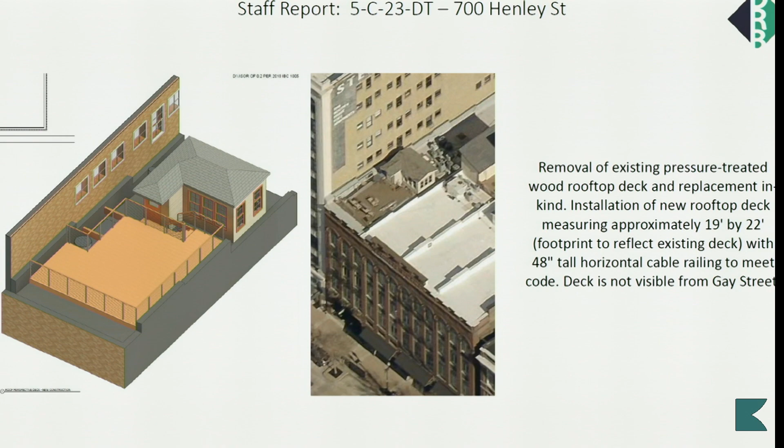The second was not at 700 Henley Street, that's an incorrect address. That's at the Commerce Building on the 100 block of Gay Street. The applicant removed an existing pressure-treated wood rooftop deck and replaced it in kind. You can see the existing deck in the pictometry rendering on the right, and a rendering on the left showing the new deck to be reconstructed. It's not visible from Gay Street.

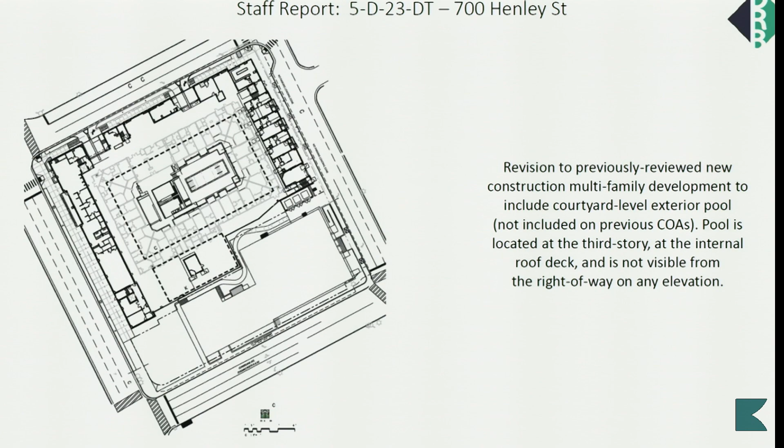At 700 Henley Street, the Church and Locust development, this is a revision to a previously reviewed new construction multifamily development. It includes a courtyard level exterior pool that was not included on previous COAs. This pool is located just at the 3rd story at an internal roof deck. It's not visible from the right-of-way on any elevation.

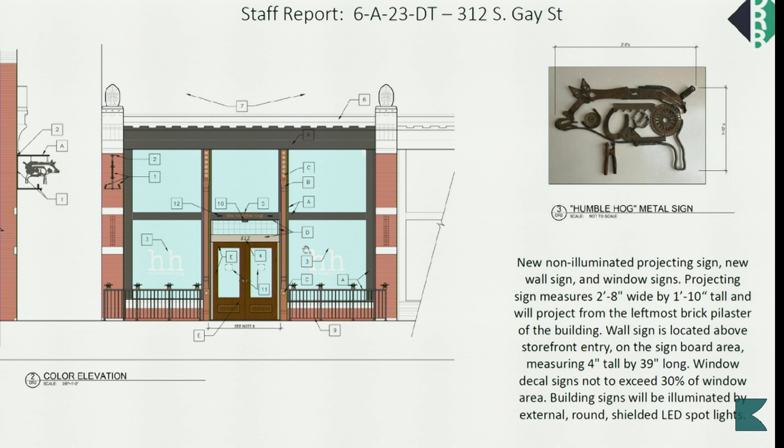On the Century Building at 312 South Gay Street, there will be a new non-illuminated projecting sign, a new wall sign, and window signs. The projecting sign here is a sculptural element that will be illuminated by external round lights. There's a wall sign centered above the primary entry, the leftmost entry for this storefront on the signboard area. And then window decals that won't exceed 30% of the window area. That's it.

Thank you for that. Let's move on to the certificates of appropriateness. We have 706 Walnut Street, 6B23DT. Lindsay, can you give us an overview on that?

Yes, this is a relatively minor revision to previously approved drawings. The board reviewed this project initially in April 2022. This is focusing on the north elevation fronting Church Avenue and the leftmost bay on the 2nd through 5th stories, which are now proposed to be partially enclosed with new exterior brick to match the existing brick on the building. These will be smaller, square, single light storefront windows aligned with the bottom of the following bays, so those windows here. And on the rear elevation, there are revisions that include a new brick enclosed stair area.

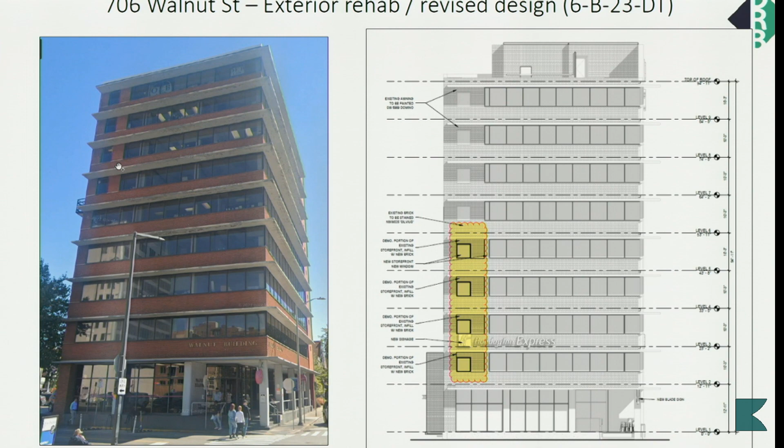Some of the staff comments in the report: enclosing portions of original window patterns isn't typically considered appropriate. However, these proposed modifications to the windows on the 2nd through 5th stories do reflect some previous modifications on the upper level. You can see the existing conditions in this photograph here. However, the existing windows on the 6th through 9th stories are aligned with the flat awnings dividing each story, as opposed to, as indicated in the drawings, being aligned with the bottom of these windows that follow. So the staff comment would be that the enclosed windows on the 2nd through 5th stories should reflect those on the upper stories in size, placement, and relationship to the other windows.

In terms of the rear elevation stairwell, that's located on a secondary elevation, and those materials are compatible with the building. So staff is recommending approval of 6B23DT, subject to the condition that revisions to the placement or size of the enclosed windows, with the intent for them to be compatible with the existing windows, be submitted to staff for approval. Thank you for that explanation.

Is there anyone from the development group that would like to speak?

These revisions were really due to some code implications with extending the stairwell down and how the fire-rated wall would intersect with the existing exterior glass windows. Hence why the window placements were reduced on the front elevation. And on the side of the building, we have decided to remove the existing fire escape stair, and due to the proximity of the building to the property line, we wanted to enclose the new one-story stair access to abide by the IBC.

That was it. I don't know if you have any other questions regarding the revisions.

No, thank you. Is there anybody that would like to speak in opposition? No, thank you. Okay, well, I'll open up questions for the board.

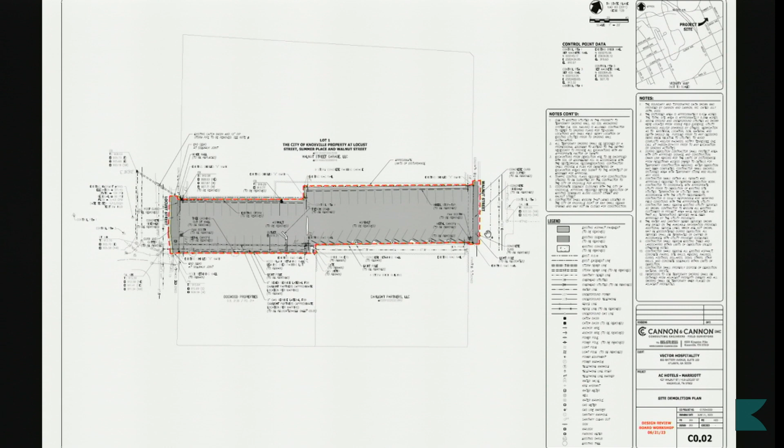Do we go to the next page? Let's see, probably—do we want to talk? We'll talk about the sidewalks later, but maybe we can go over the basic plan. So on the Locust side, let's go to the next page. There we go, we can step.

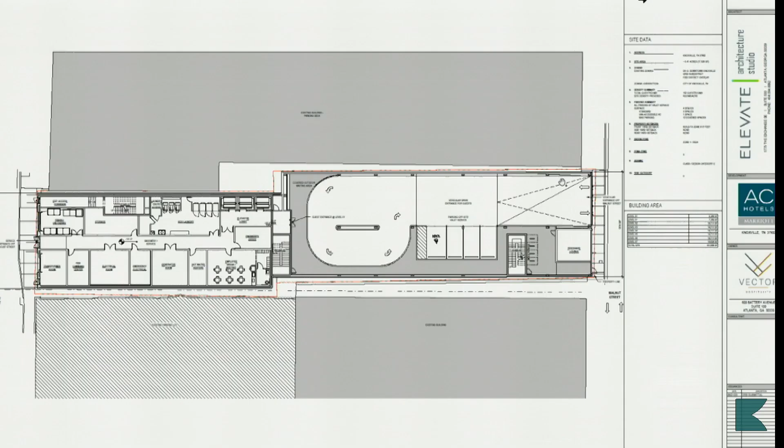So this is kind of a site plan that shows both sides at the 2 levels. On the Locust Street side, which is on plan left, is going to be our service entrance for the hotel. We've got trash, the major utilities, fire command center, back-of-house laundry, things like that. So basically we're viewing everything off of Locust as more of our service entrance side, and using Walnut Street—since that's a two-way street—as the hotel entrance side.

So on the ground floor, you'd come in and have a pretty small turnaround. And the goal of this project is really going to be, the majority of the parking is going to be off-site valet for the ownership team. And so we'd bring everybody into the hotel entrance on this side.

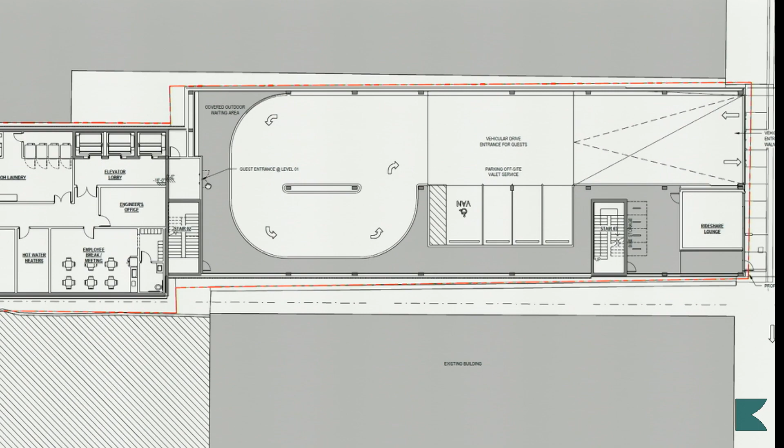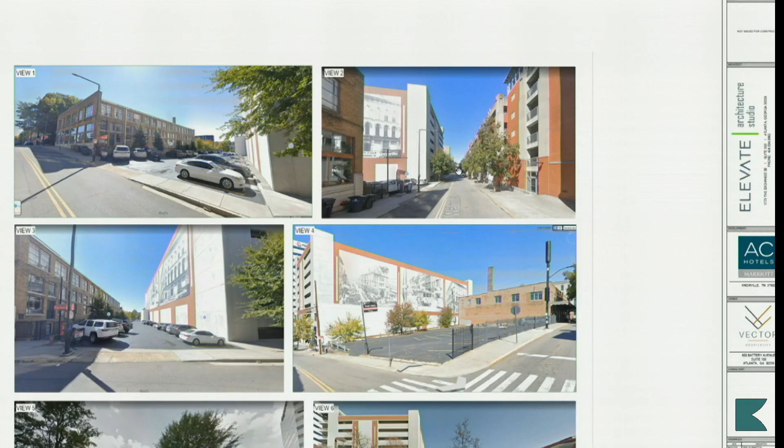And really the way that we've designed this hotel is on the ground floor would be the entry—or on this, what we're calling level 1, is the entry sequence to drive into the hotel. And then guests would come up to the hotel entrance into the elevator lobby. This is actually what we're considering a jump lobby, so the hotel registration, everything—they're going to be going straight to the 7th floor. If we want to go to, this is the entirety of that level.

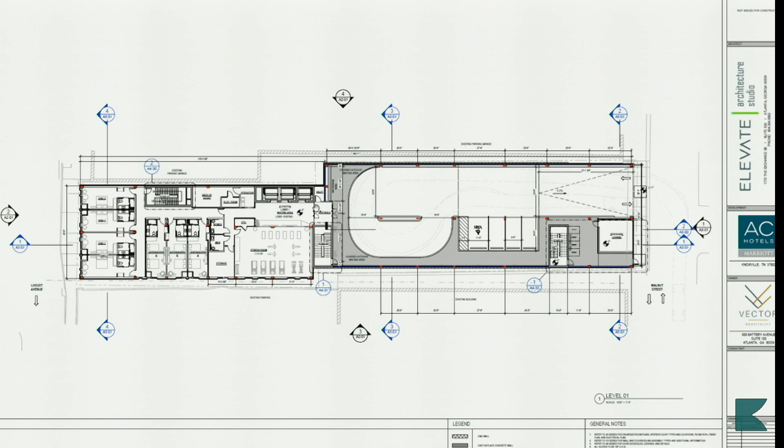When you come up, this is one level above Locust, but the same level as Walnut. We have a few guest rooms on the Locust side, elevated up 16 feet off of Locust. We've got a fitness center, and really there's probably primary or private activities for the guests at the AC. Levels 2 through 6 are all hotel guest rooms.

Then you get to level 7, and that's really where a lot of the public area functions are going to be. You come up off the elevator, you have the hotel entrance and the lobby area. You're going to have a rooftop bar component, the required AC kitchen and their AC lounge area, and then you'll have some meeting space as well.

This is technically considered a high rise, so due to the occupant loads, we've incorporated 3 sets of stairs, as well as exhaust shafts and other things required for a high rise.

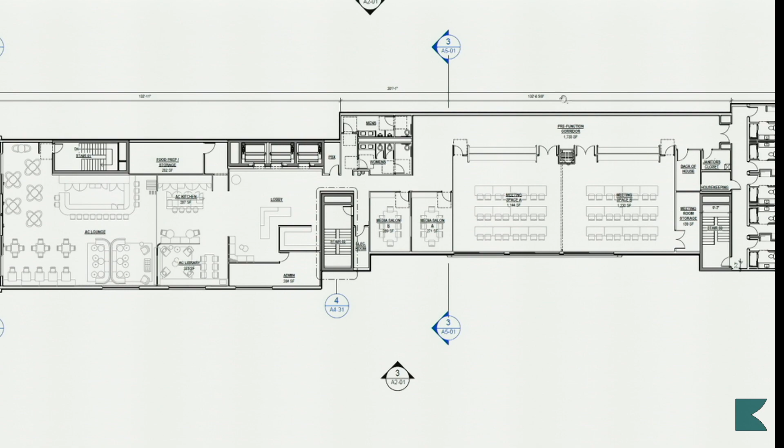And then if we want to go to the next slide, we can go over the elevations.

The primary materials we're using for the building right now are probably some type of wood look material similar to a Nichiha, and then metal panel primarily around the building. We've had some design direction from Marriott we had to oblige by as well. So we've got brick at the ground floor, turning into Locust and Walnut Street, and above that metal panel, and we've got a Nichiha highlighting the rooftop bar on the back, as well as the hotel sequence and entrance on the front of the building.

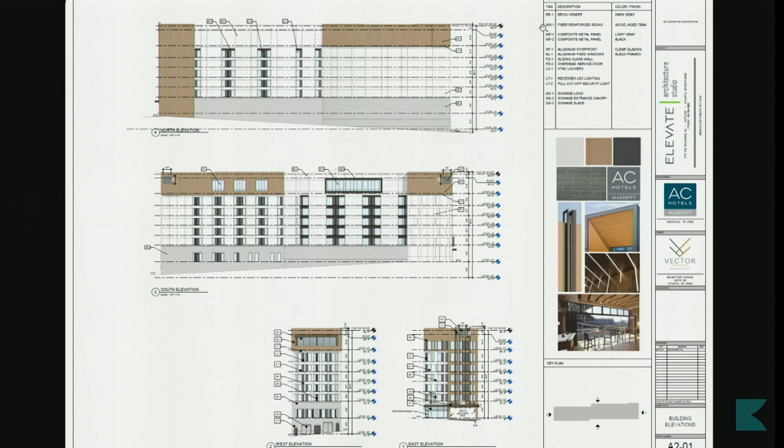On the right hand of the plan, page right, you see a description of all the exterior materials we're planning to use. In the next 2 pages, we've got more blown up elevations.

Based on the district we're in, downtown, the DKG district, we view Walnut Street as our front-facing entrance.

We do have a few questions about how we've met the transparency requirements, but what is the drive entry sequence really considered at that point? Because it's just a void, so I'm assuming our percentage of glazing is really paid attention to on the facade along Walnut, and the back is more just public-facing. Locust we're considering kind of the rear, but it's more of a public-facing entrance. So we've tried to maintain our entrance sequences, and then having access as service entrance and access required for trash and loading and things like that.

I think Jason, do you want to?

I think we had some questions as well regarding, we've got our sidewalks kind of worked out along Walnut Street. I know we had some questions about the Locust Street side due to the grade differential between one end and the other.

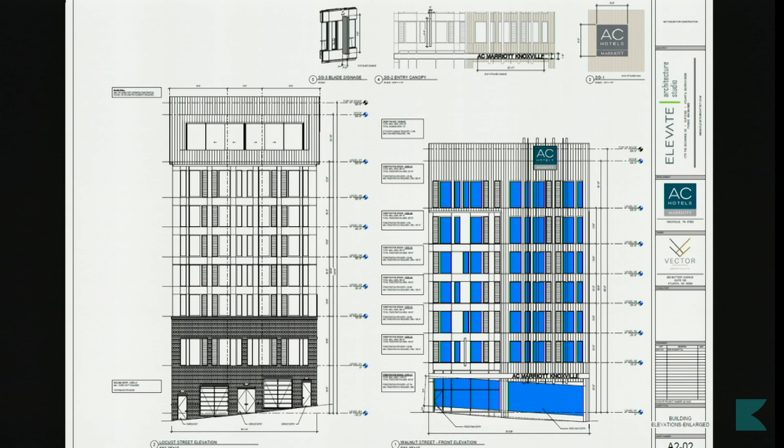If you want to, there's a page that's got an enlarged sidewalk plan with some elevation stuff, yeah, that one there. The top one's just showing the Walnut Street side, which doesn't have as much grade change as the Locust side, but this side would have our primary garage entrance, so we'd have a lowered driveway ramp per TDOT standards. The uphill side will have like a 15-foot long curb ramp to stay in accordance with ProWAG to meet ADA standards. So that one's pretty straightforward.

I guess the Locust Street side has pretty steep grades to deal with, so we've got about 11.5%. It kind of varies across it, but the steeper area is about 11.5%, matching the road profile grade. So a couple questions: one would be we've got a trash enclosure access, and then there's a stairwell connection - it's a fire egress stair, on the plan left-hand side, and we got electrical on the plan right-hand side.

What we're showing on this plan is holding basically a 6.5-foot wide sidewalk from back of curb to match the city standards, and this would match the roadway profile with a 1% cross slope. So all of our connections into the building are going to have to warp pretty greatly just to make up for that difference in grade.

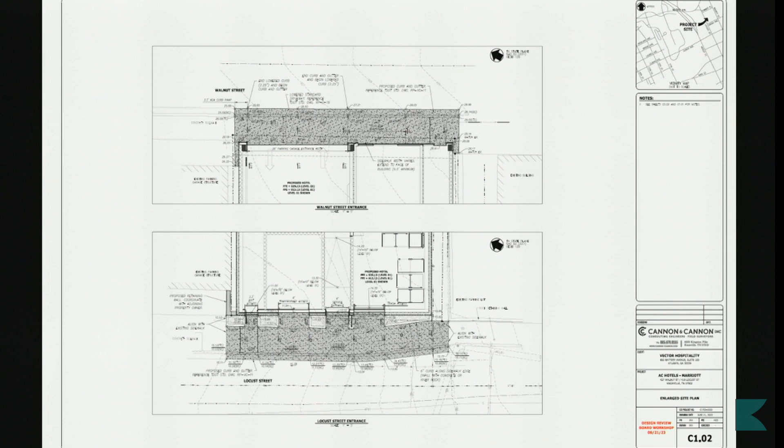I think we included an alternate plan where we looked at basically pushing the sidewalk up against the building and then creating some landscape zones to try to transition some of those grades. But the biggest challenge we've got right now is just how our slope interacts with the building connection itself.

Have you guys scheduled a pre-submittal conference with plans review and inspections and the engineering department? No, we haven't yet. Okay, because I would say these types of questions are probably a little better directed for them. That's the meeting you can schedule with Brian and Peter's department. You can reach out to Jen Scobie, and I can give you her email. I'll email you her contact. That'll give you the opportunity to sit down with the different folks in the engineering department and the fire marshal and ask those kinds of questions.

This board is primarily focused—we'll talk about the sidewalk in terms of the pedestrian experience, pedestrian safety and access, and sort of activating that streetscape level. But mostly what this board is focused on is exterior design.

Okay, yeah, I guess part of the reason I was bringing that up was to ask if there's any kind of street furniture or landscape, any of those things that might impact these grades, and how we work with engineering on meeting the sidewalk accessibility portion.

In terms of the street furniture and landscaping, there are design guidelines associated with that. However, they are guidelines and not requirements. And with the drive aisle and the access, I think your concern there is probably first and foremost going to be safety and sight distance and all of that. The guidelines do say plant street trees where possible, but a lot of those are focused more on the public realm and the public rights of way. So you guys won't have a specific requirement from the design guidelines to do those.

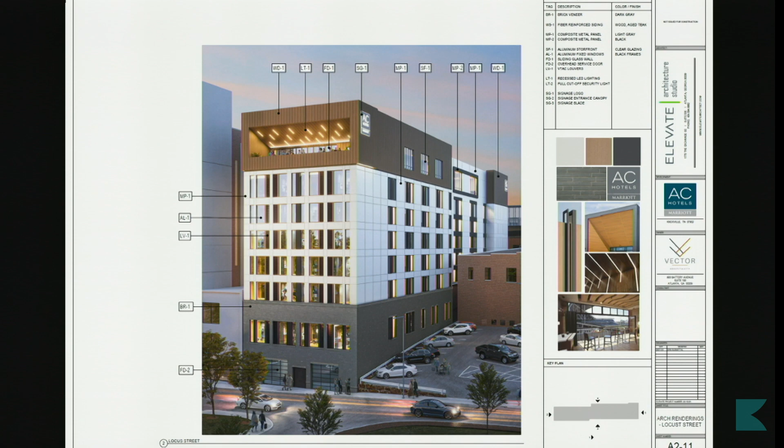Will you go back to the other rendering, please? That one, I like your outdoor patio up there. I think you're going to be challenged with that western face exposure in the sun, particularly in the summertime. It'll be pretty hot up there. Yeah, and I know it's totally outdoors, so you might think about screening or something like that.

We are thinking about some type of screening material, also for the wintertime for inclement weather. We've had a conversation with the ownership teams about how to get that screened for inclement weather as well as during the wintertime, so they can utilize it not only in the summer but the winter. The goal isn't just for the guests that are going to be there, it's supposed to draw the community up there too, to the rooftop.

Is there a certain view you're trying to frame to the west rather than south towards the Smoky Mountains? I think our concern is on the other side, where there's a pretty tall parking deck on the other side of Walnut. So for us, it'd be like looking out towards the parking deck. No, at the top floor, I meant south, like back towards the Pembroke and behind you. I was just wondering, I'm not designing it.

I'm just saying, if the western face is an issue, that west patio could just rotate to that blank facade that's currently there and look the other direction, which would still be south facing and still have heat gain issues. So I'm wondering, are you trying to frame a certain view that way? I think they're trying to encapsulate some of the World's Fair Park if we can get to it, based on the height. The other concern was structural, with how we're locating structure on that side of the building, because we had to maintain a certain minimal amount of openings on that facade, not only due to how close we were to the property line, but also how we're dealing with the structure on that side of the building.

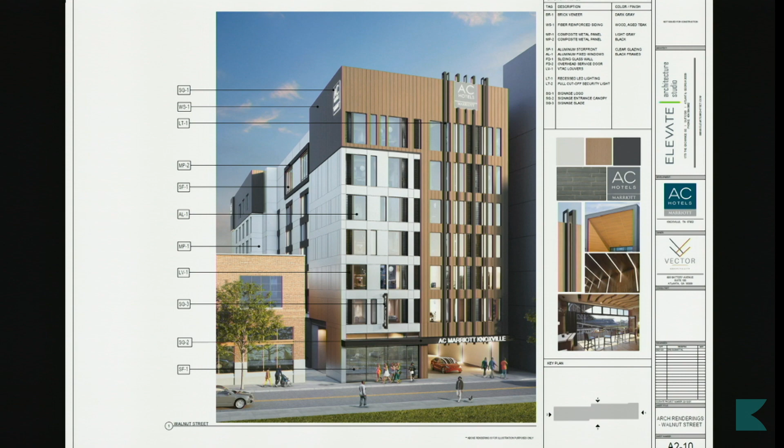So in working with Marriott through the initial concepts, we did have a limited portion addressing your concern about the wood look. They felt we needed a little bit - they wanted to draw more attention to how the entry sequence and guest arrival was, hence why we've kind of brought that down. And they wanted a little bit more warmth to the palette other than just metal panels.

So that was the introduction of the wood material to the building. But you can get that warmth with patina - you're not going to get copper or terracotta on this project, I'm sure, but maybe just lean into that tone, that color is warm. The granularity of the wood imprint may not be there, but maybe there's other ways to achieve it. I'd think the project would be more successful to not be that much of a wood look, and just say we're a solid material with texture maybe, but not imitating wood on that part. It seems very foreign to downtown - if you squinted and covered up the white, it's an all wood building on that facade. It just seems foreign.

Hitesh, you said you'd talked to a couple of general contractors. Have you priced these drawings? Not yet, no.

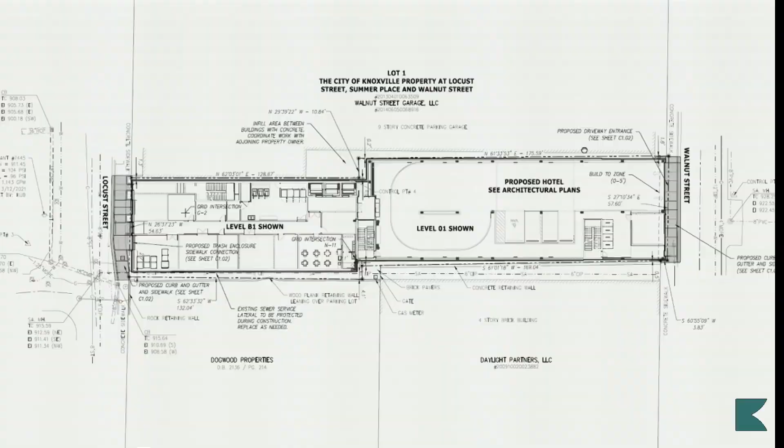I had a couple of comments about plan. If you want to talk some more about elevation first, Suzanne. Nope, I want to talk about plan too. Okay, if you could pull up C101. I think it's that one - yeah, it's where we were talking about in the front on Walnut.

Of course, one concern I am always charged with bringing from the design center is the notion of crossing sidewalks with cars. We discussed this in the office and really couldn't find another way to get your check-in to work without coming across the sidewalk with the car. But that really breaks down this notion of keeping our ground floor retail and transparency to the street and people spaces.

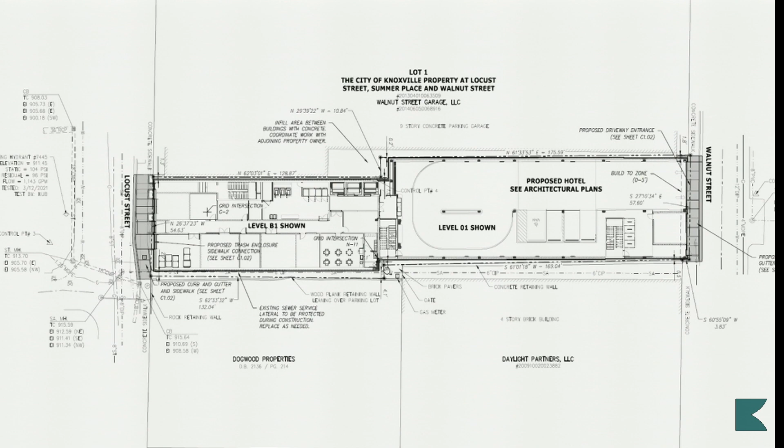So on the Walnut Street side, I can't tell what the little square things are, but it looks like there's an opportunity to make the space from Walnut Street back to the stairwell a more viable retail space - or something to go in there that engages the public and brings the street in. The little rectangular things on the Walnut Street side of the stairwell could move to the four parking space side of the stairwell so you could still have those uses there. I think we had bike parking there adjacent to the stairwell.

And I think the goal was also - it kind of varies from the rendering because we're obviously in design mode - but the distance between that retail and the exterior wall, that was part of our trying to bring it because of the grade that's happening across Walnut, but also being able to have the guests come out adjacent to the retail on plan south versus coming across, having to be adjacent to the drive aisle. But I do understand the concern about crossing over Walnut while cars are coming in and out.

So the space between the little retail square and the south wall toward the daylight, that is intended for the clients to go out to Walnut Street rather than along the drive aisle. Correct. I understand, it's just looking for opportunities to expand that retail and public engagement in that corner - maybe other ways where you could keep the guest exit over on the drive side, but find another way to screen them from it, or expand the retail back to the stair. It really seems to make it a more viable space.

And then I have a similar comment on the Locust Street side, responding to the comment that it's not an alley - it is a public space where you'd like to engage similarly with the public. This floor plan is different from the one I had initially, and we have a space toward the garage that in the first plan I had the garbage in it.

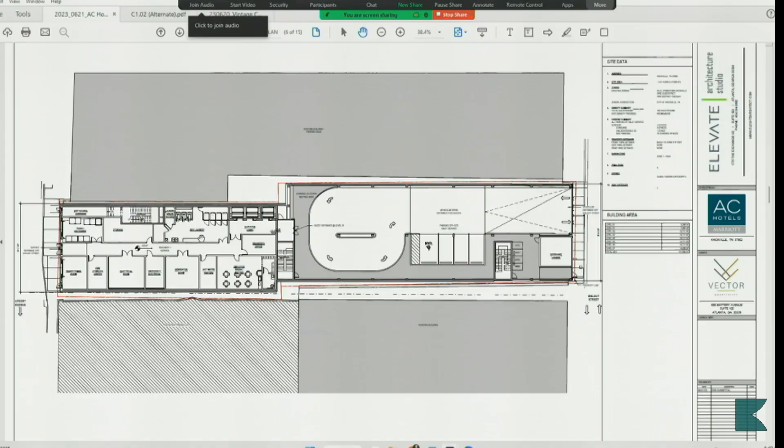But the later one I was seeing had the trash on the south side where the transformer room is. Just some way to align those services to one side, to where back on the Locust side you could also have a corner dedicated to some sort of retailer, office, or some space that's not all back of house.

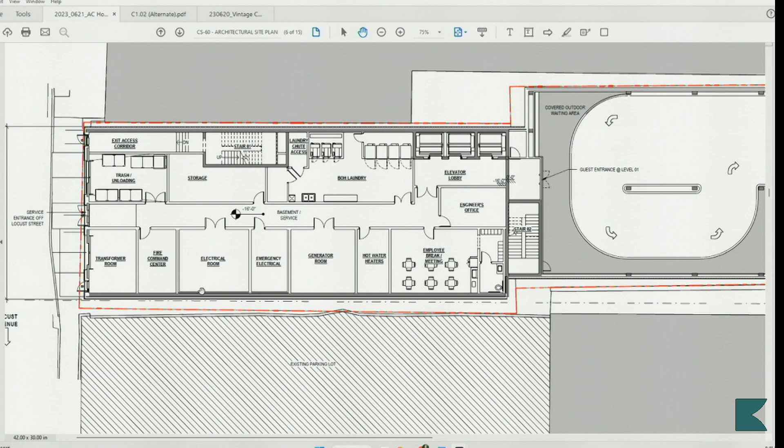And I know that service entrance off the back is not really intended to be a grand entry, but it would be a very convenient entry for guests to come and go from the fair site, from Chesapeake's, and other places they'd want to go. You could make more of that as an entrance and have some accompanying retail on either the garage corner. I think grade may behave better on the garage corner than the Union corner up there, and have your trash dock on the upper one as a loading dock space.

Just looking for ways to achieve the public engagement and access, and make that less of a secondary space. I think even moving the employee break room out to where the employees get light, I know Marriott likes that type of thing and they're requiring much higher quality break rooms these days, that may help you keep all the back of house still there, but still feel like there's activity and engagement on that street.

I think we can talk to KUB and see what their thoughts are about inboarding some of that transformer room, and if they're okay with that.

Can you describe if it's valet parking, and they're valet parking them at Walnut? Does that mean Walnut Street will perpetually have cars parked with their flashers on, or is there a place for a bulb-in to pull in? No, there's not, because there's sidewalk there. Is there a shoulder for them to park in the plan? I was thinking, what's going to happen to that street when it's 7 stories of humans, or 6 stories of bodies, and single cars are pulled up to the front to get let out, then their car leaves to get parked. There's going to be a lot of congestion there.

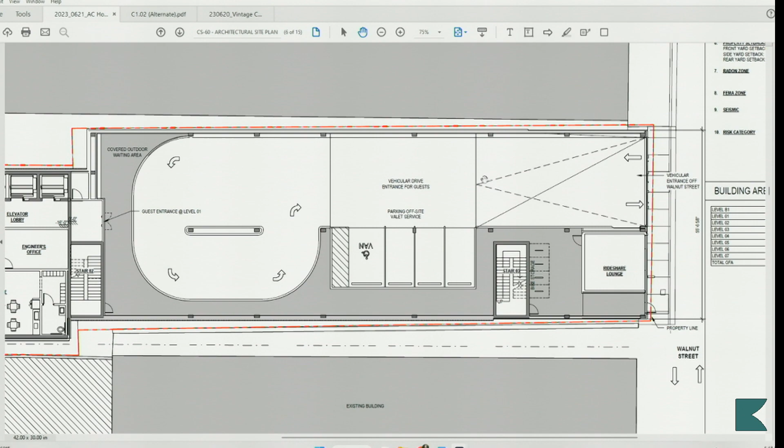We just have a few more minutes. If anybody has anything they want to jump in with that hasn't had a chance to, please do that.

I just had one comment about the Locust elevation, which I think is the stickiest part of the project because of what we've already talked about, that Locust is a viable city street and needs to be treated that way. I wondered if there's any opportunity for balcony or Juliet balcony on those rooms at the back, to try to activate that side of the building more on the guest rooms. I know it's raised above the street, but I think anything you can do on that elevation to treat it like an active street and not an alley would be helpful.

Okay, yeah, we can take a look at that. That's similar to above Eddie's health shop, they've got the balconies but then the parking garage below, so it's a similar condition.

I have a couple of comments you'll probably hear from city engineering. Looks like you had some doors that will open up over the property line, over the public sidewalk, that would require easements. My guess is, especially on the Walnut side, the sidewalk's a lot thinner and you probably won't get that approved, you might need to push those back. And the entrance, the access to Walnut for the vehicles, engineering is going to be looking for sight distance, particularly for pedestrians on the sidewalk, for vehicles exiting.

So you might need to push things back a little bit to be able to get the proper sight distance. Definitely talk to them about that.

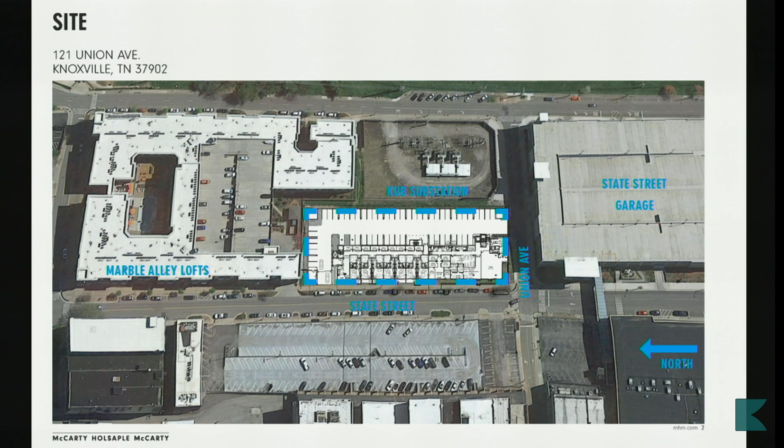So we're presenting Vintage Cal Luxury Apartments. It's currently going to take the place of surface parking. If we go to the site plan, it's adjacent to Marble Alley Lofts and across the street from State Street Garage, along State Street and Union Avenue. Currently the plan is to build 160 apartment units, around 4,400 square feet of leasable office space, and then a 2,000 square foot retail space. So if we go to the existing site plan, it's an existing surface parking lot.

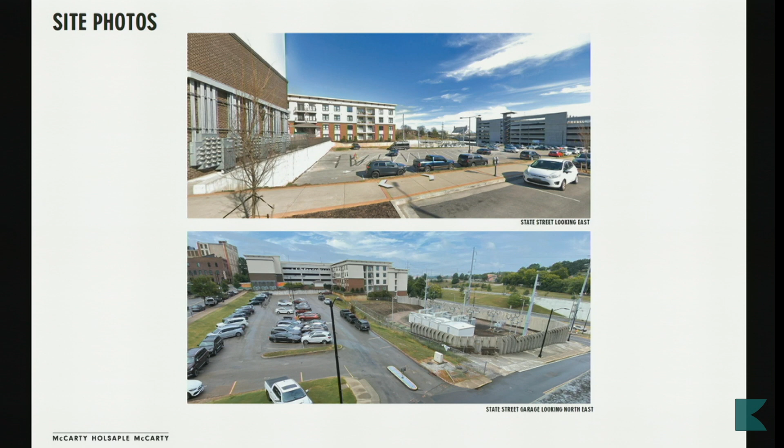It's partially below street level, the further north you go along State Street. And then it's adjacent to the KUB substation with the concrete wall surrounding it.

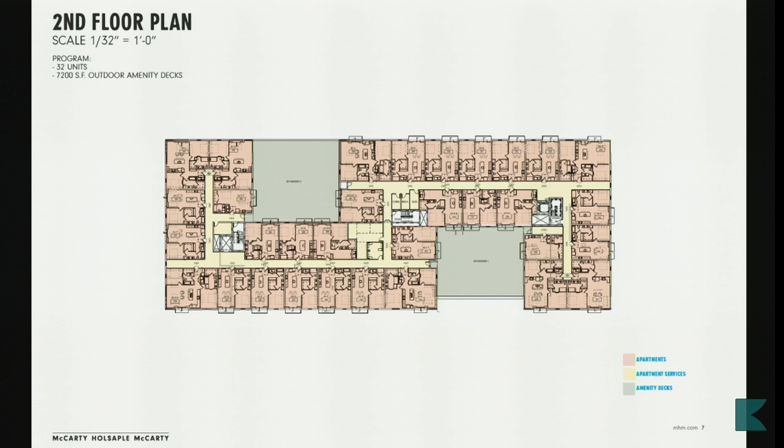If you go next, this is the basement plan. You enter the parking garage off Union Avenue down a fairly steep hill adjacent to the KUB substation. And then we have another 110 parking spots down there, bringing us to a total of 167.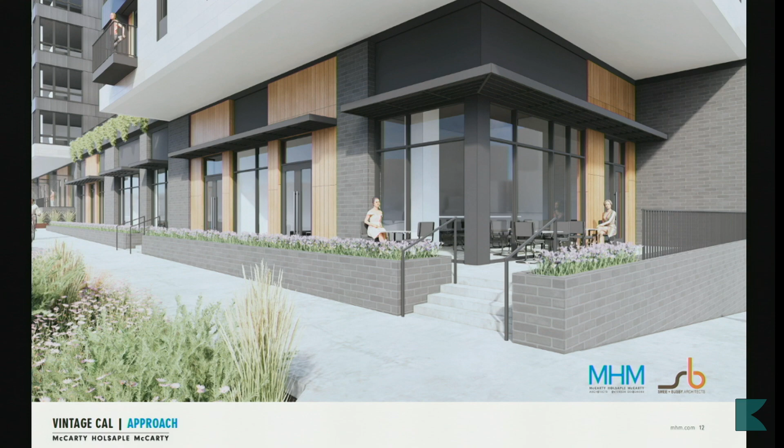This is a view of the retail tenant space from the street level. You see the cantilevered portions coming up over our head, and then we have a sunscreen over the storefront. There's a pretty drastic grade drop across State Street from north to south that we're having to incorporate the entrances with.

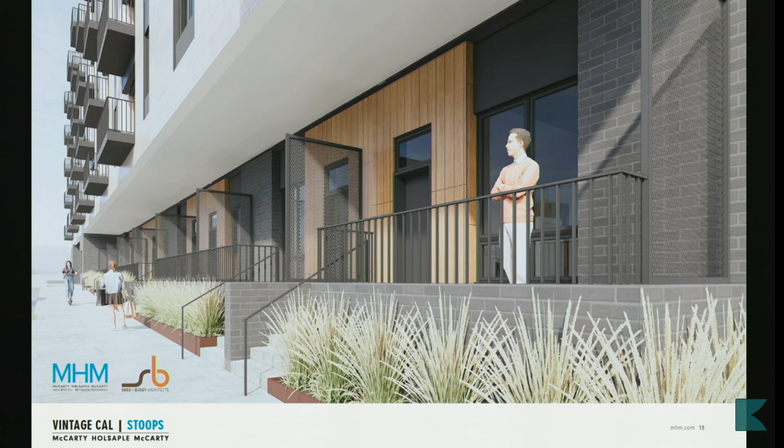We have a couple stairs leading up into the space to create something more open to the street front. But as you move further up towards State Street, the slab steps up quite a bit, so some of the residences have larger staircases, decreasing as you go further north towards the parking garage. Each of these stoops in front of the townhomes has a perforated metal screen to create a sense of privacy so they can actually be occupied and feel lived in rather than empty all the time.

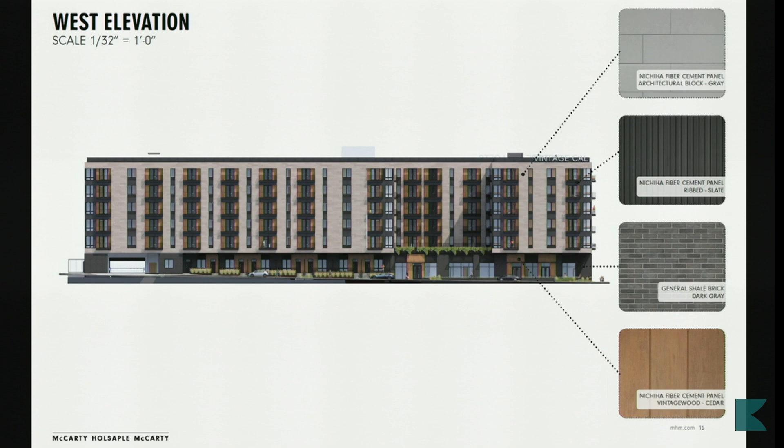Here are some elevations showing the materials and their locations. You'll see the fiber cement panel, the grays, is the main material, with carved away strips along where the windows and balconies are. At the entrances we put the vintage wood, the faux wood panel. Then on the backside there's cast in place concrete at the podium level on the parking garage - that's the fourth material.

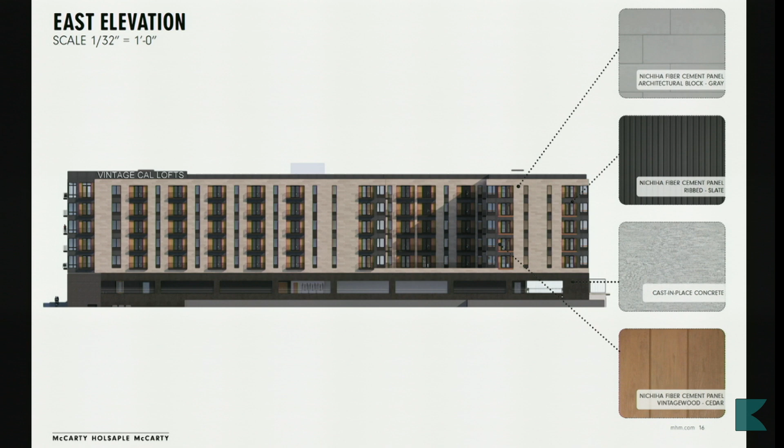You can't really see it from James White Parkway because of the KUB retaining wall. Those are the east and west elevations.

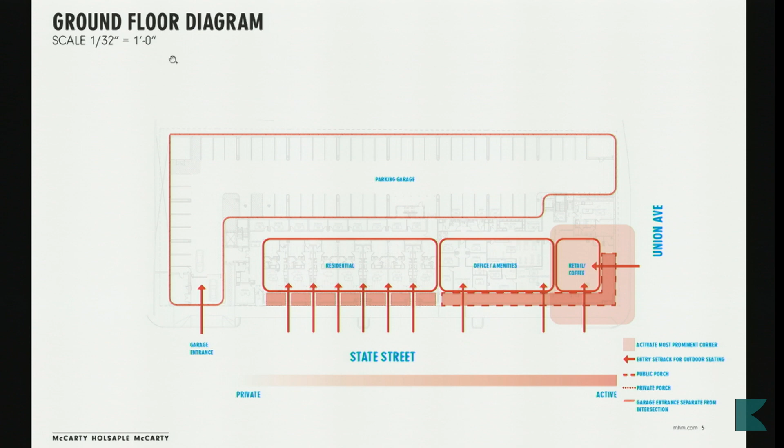We had one question come up from Dustin in my office, who is our never-drive-across-the-sidewalk guy. I noticed this is called Marble Alley Partners - I think I saw here.

The question came up - would there be a way for the two to share a single garage entrance rather than have two garage entrances next to each other? I don't believe that's possible - different tenant groups, and the levels are very different. There's, I think, 22 different slab heights for the Marble Alley. That was just the question looking in plan - would there be a way to put these redundant entrances together?

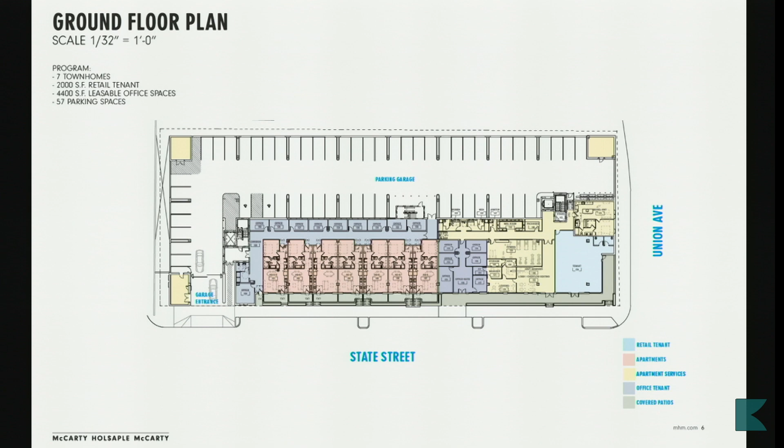Where is your trash? In that yellow box directly left of the garage on the plan. They have concierge trash service, so on each floor there's a trash room, and every night somebody comes and picks up the trash and takes it down to the bins. On trash days, which we think will be at least three times a week or more, they'll roll them out to that first parking space just right of the entry in an enclosure, get picked up, and roll them back in immediately after. Everything on Union Avenue at the first floor where we wanted it was just too steep, and they couldn't make it work.

Are there any occupancy limitations to having that office space be retail, like if it turned into a coffee shop or store? We'd have to look at plumbing counts, and we'd have to create a secondary entrance because I'm sure it'd be over 50 occupants.

There's some pretty good public-private separation. That hallway in the back, that line sort of creates it—on the right side, that's private back there, and everything down below that side is public. There's limited access to get back there unless you're living in the apartment complex. The left side is more public, offices in and out, and they have their own restroom.

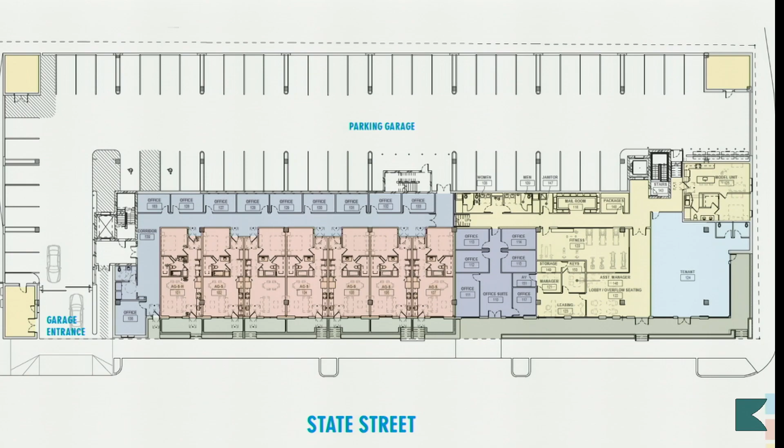Especially that purple bar along the back—are those intended to be individual use offices, or a company leasing the whole space? They have this model set up in multiple projects around Tennessee, and they lease them out individually, primarily to tenants of the apartment building, so if you wanted a secondary workspace rather than your studio apartment. But it would be open to the public as well if they didn't fill them. We're looking at putting some high clerestory windows to let light in from the garage side into those offices.

Does anybody on the board have thoughts on exterior design, materials? I like the exterior design. You can thank Cameron. Were you involved, Cameron? At one point it's gone through about four different hands. I originally had it with masonry on it, and then because of budget, it got filled.

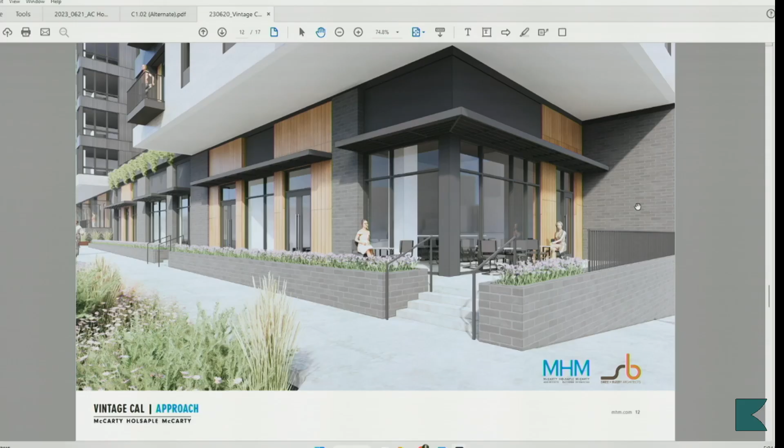I did have a question. When you had the close-up of the corner there—I don't know if this is just a scale of rendering issue—but the scale of that block looks like CMU scale rather than brick scale. It's brick. It is brick. Okay, I am not a good renderer. There's an adjustment in Revit for that. I just wanted to make sure it wasn't CMU. No, it's a general shale brick product, kind of a very dark gray color.

Have you thought about changing the tenant access entry to look a little less like a storefront entry? Looking at this image, I just don't know which one's the residential entrance, and we don't have signage shown at the moment. We left signage off to not obscure the conversation since that's a separate permit or review, but there would be signage on top of the louvered awning above each entrance denoting the use and tenant. I see what you're saying though—we might do something that calls that out, even if it breaks the canopy a little. We're doing something with the canopy, and of course there will be signs and stuff like that.